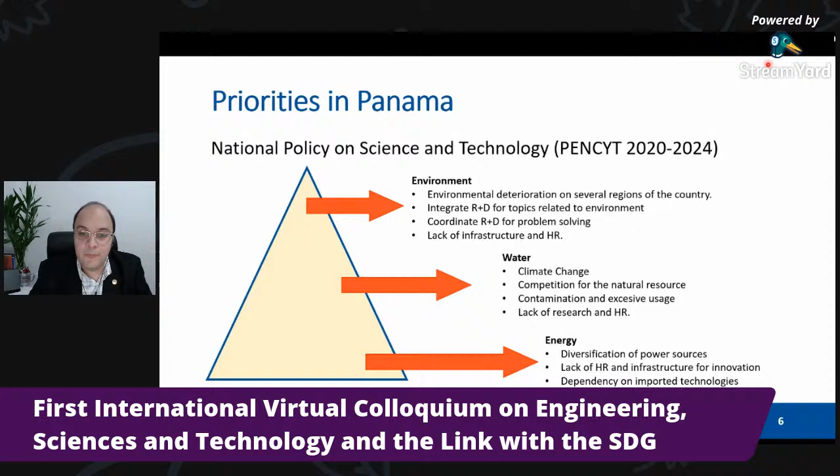They say, well, environment, we have deterioration in several regions of the country. We need integration of R&D for topics related to the environment, coordination for problem solving, and then we have lack of infrastructure and human resources. And that's a common denominator for all of the identified areas. Now, when one looks at the Panamanian policy for science and technology, you may say, well, infrastructure is not here. And well, it's not true. In reality, it is there.

Every time you think about water, as we're going to see here, for example, lifelines, one type of lifeline is the water supply network, and that's a type of infrastructure. So there's a deep correlation between these sustainable development goals that, at least here in Panama, we need to think about all of them every time we want to start a new research endeavor.

Now, the other plan that we have here in Panama is very well aligned with the United Nations SDGs. It does give us a little bit more leeway when we want to think about how to solve a problem, and the problem is not necessarily, let's say, water, which is a well identified necessity in the country. But if we deal with something that has to do with water, and find a way to solve other problems at the same time, then we have a project that is very attractive for policymakers. Now, with that brief introduction about SDGs and the reality here in Panama, the priorities that we have, I would like to move on to speak a little bit about the projects that we're developing here.

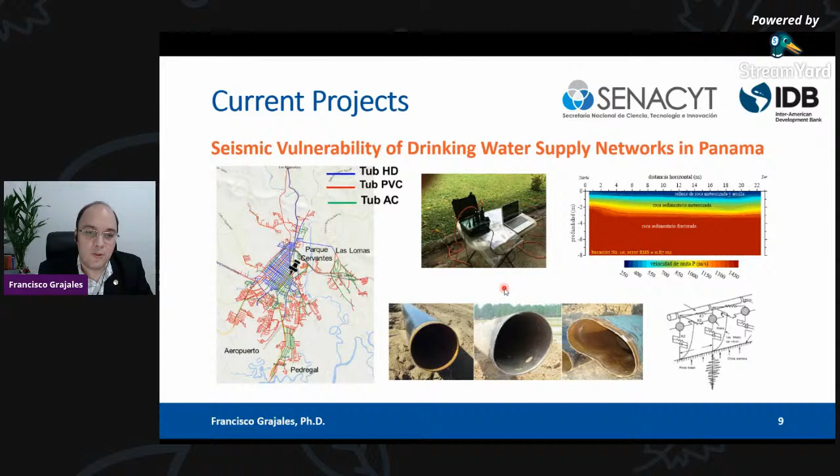So this is just to mention some of the components, and as you can see, the whole idea is, once we do all of these, to be able to generate a more complex risk analysis framework.

Now, project number two, we change gears completely and talk about energy. We have the project entitled Characterization of Tropical Soils for Low Enthalpy Geothermal Energy Applications. In this project, I am co-PI, so the principal investigator is the student.

Here in Panama, we have this type of project where the student is able to empower themselves as PIs with another responsible faculty member, in this case, Professor Guadalupe Gonzalez. As you can see, again, the common denominator between these projects here in Panama is that you have to deal with several of the SDGs.

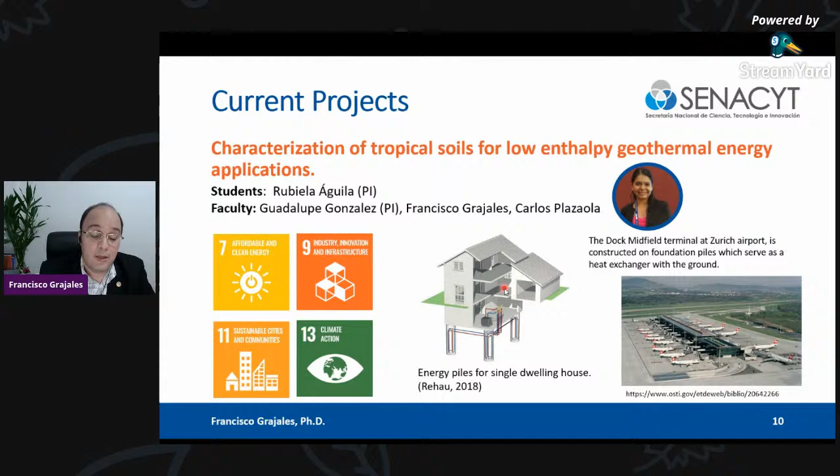Obviously, the main one here is energy, as we are trying to find sustainable sources of energy, but we are also innovating on the infrastructure, working on sustainable cities, and taking climate action, since we're reducing CO2 emissions.

The whole idea here is what we commonly call energy piles. We have a diagram showing that the foundation is part of the structure we need for support, and the idea is, why not take advantage of that and use the foundation as a heat loop, or a heat exchanger, to inject or harvest heat from the soil.

Some people, at least here in Latin America, are still skeptical about this, but we know that the technology has been successfully used in other countries. An example is this terminal at the Zurich airport. The terminal has 400 pile foundations, and 300 of them are energy piles, which account for most of the energy used by this building.

And again, we have this project, the third one: reuse of plastic waste for unpaved rural roads.

And as we can see, we are in the geotechnical realm, but we range widely. Geotechnical is a very wide area. And I want to use the opportunity here, since the students here, Ana Boyd, Orlando Leyva, Dariana Martinez, Monica Flores,

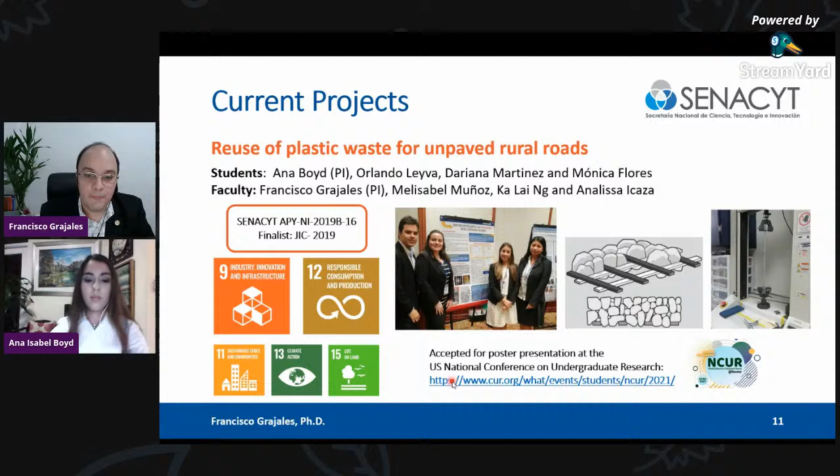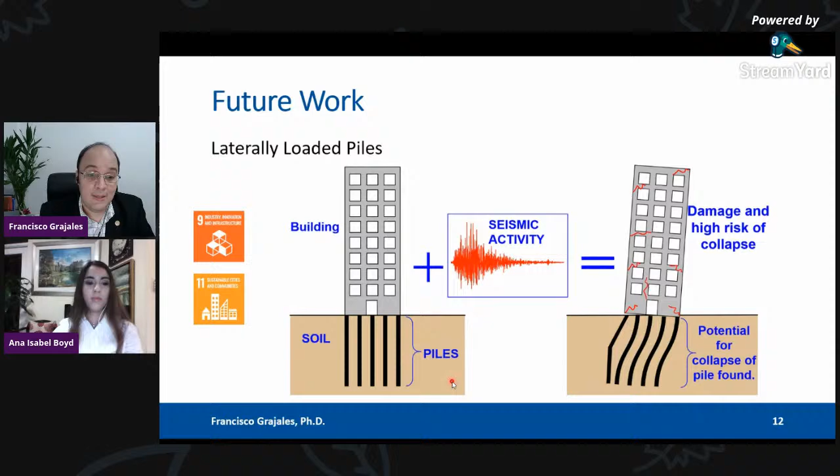You may think when you see the building, you may say, well, it's a tall building, it's beautiful, but what lays underneath of the building is what really supports the structure. And at least in our country, we don't have a well-defined framework for this analysis, basically because it's very costly to do so.

And the other topic that I find interesting to delve into, and we kind of started talking about it, but we haven't yet tried to get funding for it, is what we call, at least in geotechnical, soil bioengineering and biotechnical slope stabilization. And the whole idea here is to find a way to put together our geotechnical solutions with the ecosystem.

So to put a practical case to our audience and viewers, one of the most common cases here in Panama is when you have to do a riverbank protection. It's something that may have to be done many times these days, since we had 2 hurricanes hit us a little bit hard in some of the country's regions.

Now, the most common idea is to say, well, let's use some gabion walls and put them together, stack them, and ensure stability, and that's it.

Well, when you think about it and you look at other countries, for example, at the USA, they have the USDA manual for river protection, and there are options in which you can combine a simple gabion wall with plants and create a micro ecosystem that could serve as a buffer region. So that's another idea that we have in mind.

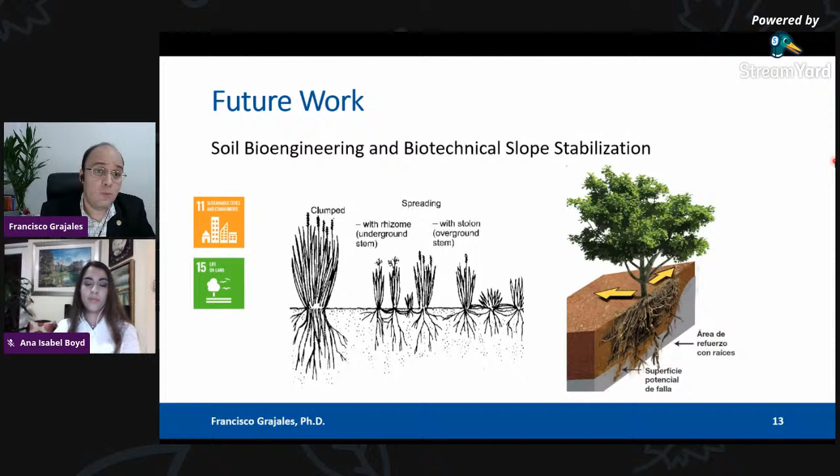We have done some minor research on this, but still need to delve into it. And with that, we are done with our presentation. And in case there are any questions, I guess this is going to be at the end of the work table. Thank you very much to everyone.

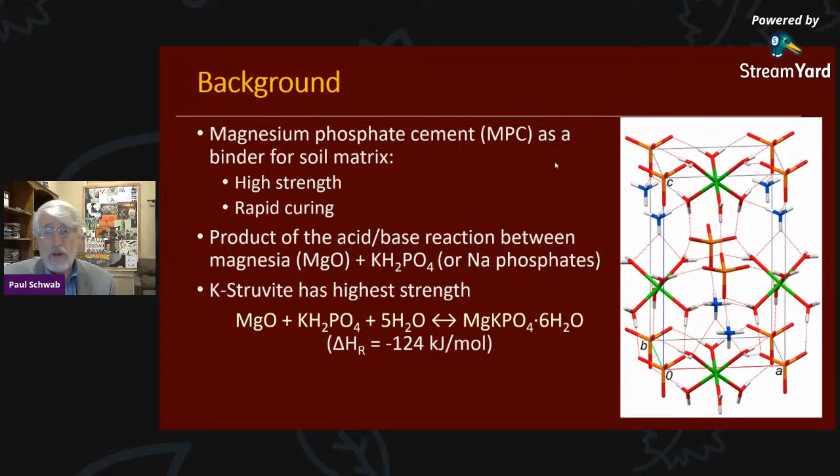We'll talk about that in just a moment. A general sort of look at the chemical structure is given off to the right. You can see that it's somewhat complex. All the dashed lines indicate the hydrogen bonding occurring within this lattice, and it is quite strong. We'll talk about some of its properties here in just a bit.

Now, the rationale of using these cements from a sustainability basis is that magnesium phosphate cements as binders for soil will leverage the use of local materials. As was mentioned in the introduction, this will include some indigenous soil, so you don't have to import things. Sand can become unnecessary if the soil has the right composition. Also, magnesium phosphate cements have a reduced carbon footprint. They don't emit nearly as much carbon dioxide during their production, partly because of the much lower temperatures used during the calcining of the magnesia.

In formation of some of the precursors for Portland cement, much higher temperatures are used. There's tremendous amounts of carbon dioxide emitted during this process, as well as the amount of energy expended, which also ultimately results in the expense, or the emission, of CO2. Now, in addition to emitting less CO2 during its production, magnesia can also absorb CO2 to form carbonates and hydroxycarbonates after its formation, without weakening, which is a very large benefit when it comes to sustainability.

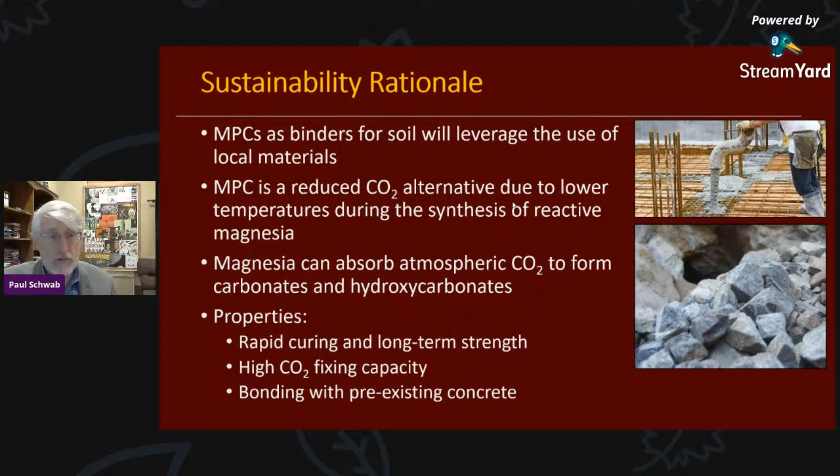So the objectives of this overall research project, which has been in place for several years and is continuing forward, is to test various magnesium phosphate cement matrices and formulations on different soil types from all over the world, look at a range of magnesium to phosphate ratios as well as water to solid ratios. Ultimately, we test for strength at various curing times, and explore the mechanisms of interactions between the cement products with soil minerals.

To approach this last objective, we've been using thermodynamic and molecular modeling. This has been sort of new, particularly on the molecular side for us. And then we look at some of the spectroscopic examination of the soil to look at the various specific things that are forming in the soils during the setting of the cements.

I'll give you a generalized approach that we've been taking to these cements. We start out with a very specific magnesium oxide. This is something we found out early on, is that not any magnesium oxide will do. It has to be calcined in a very specific way. It doesn't have to be particularly pure, but it does have to be heated to an exact temperature, so it's calcined in a multiple hearth furnace to give the compositions that's necessary.

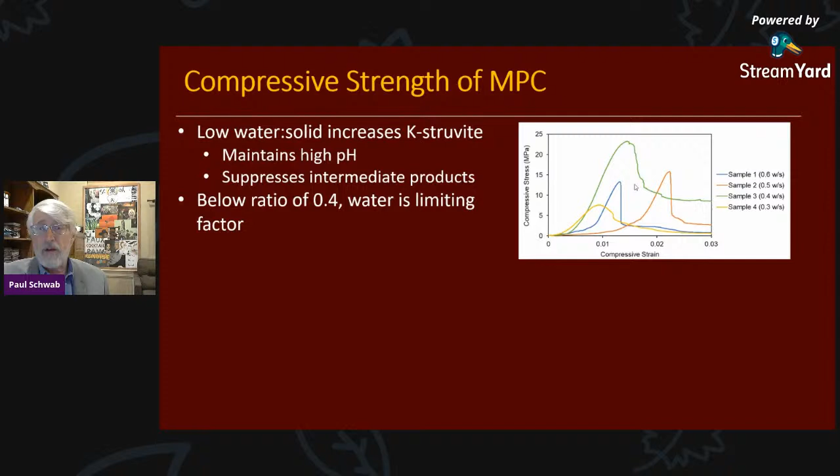Just adding up to 0.4 water to solid ratio increased the strength tremendously. The compressive strength became very high. And if we go to higher levels, we see that the strength falls off again. So we do see an optimum water content for the formulation used in this case at about 0.4. The asymmetry of these curves is indicative that these materials tend to be brittle, so they take a lot of stress in the beginning, but once they start to fail, they do fail quickly, as shown by the steep curves shown here.

These two bar graphs give you an idea of the compressive strength and elastic modulus that we've generated from some of these examples shown in the curves above. You can see that the compressive strength is good. It's not the same thing as Portland cement, but it does quite well considering the amount of actual soil that's in this composition. We'll talk a little bit more about even increasing the amount of soil beyond that.

And the elastic modulus also reflects the brittleness of this material. We've been approaching the problems with the brittleness by adding some organic fibers to the mix. Again, this could be any sort of organic fiber.

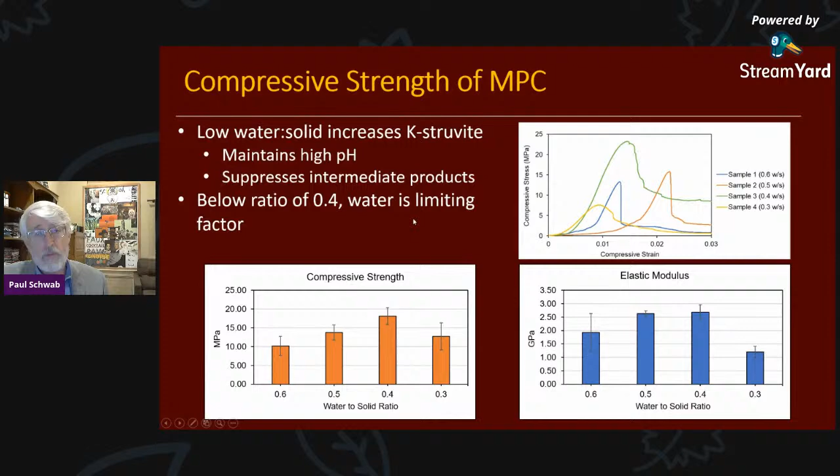We've used jute fibers made from rope, or we can use some of the carbohydrate materials from growing crops in the region as well. We've tried all of these. They all seem to work in the same sort of direction, giving a little bit more flexibility to these columns

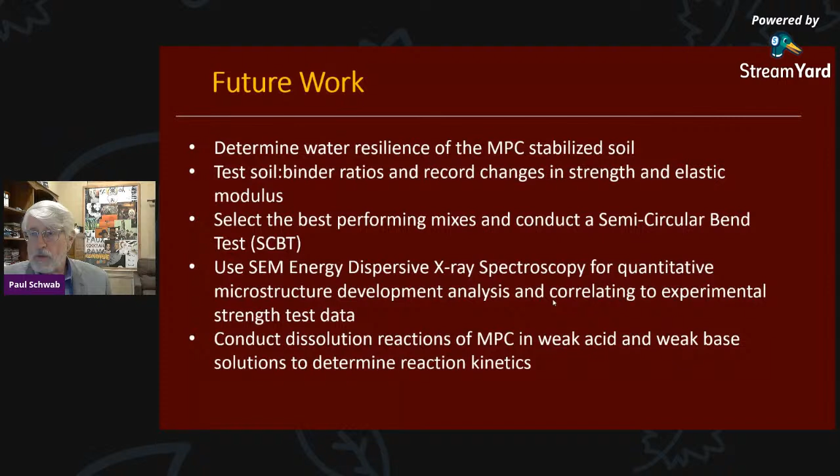And then finally, we're also looking at the dissolution reactions of the magnesium phosphate cements in weak acids and bases to try to get an indication of the reaction kinetics. This will give us the ability to project forward and get a good indication of how durable this material may be. Anyway, it's been a pleasure to give you this very brief overview, and I look forward to answering any questions you might have at the end of this session.

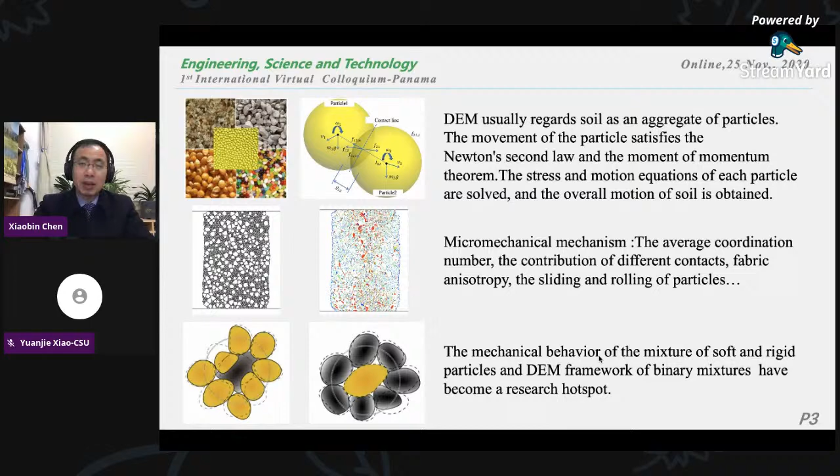I'll talk about polymer fiber used in ballast, and I use DEM as a tool to investigate the mechanisms of these materials. My topic is the analysis of shear dilatancy of railway ballast and rubber fiber composite aggregate. I will focus on the influence of rubber stiffness today.

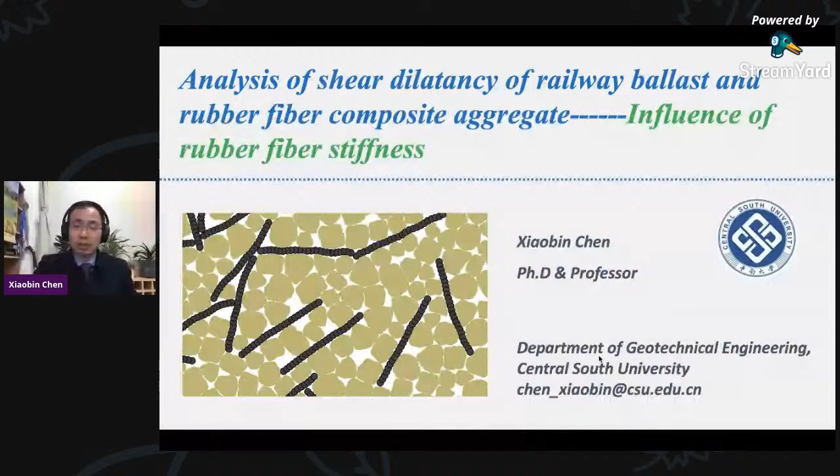First of all, I want to show appreciation to three of my students: Dr. Zhang, Mr. Yang, and especially Abby. Abby is one of my international students, and we are supervising her together with Dr. Francisco.

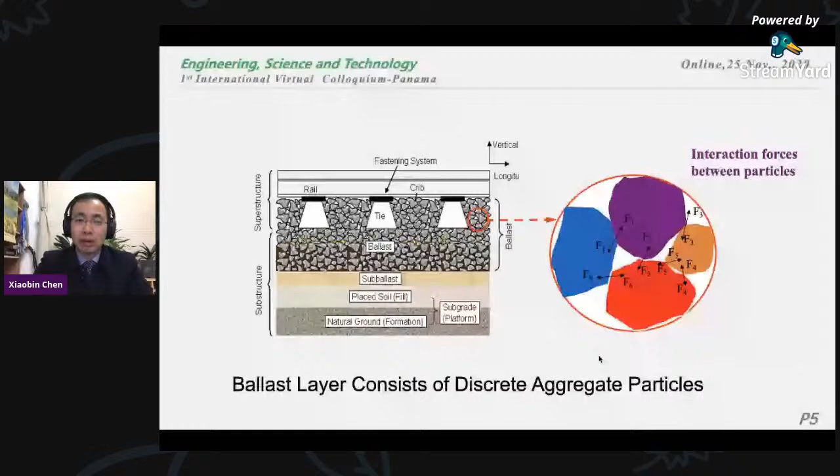As we know, ballast consists of many discrete aggregates together to support railway loadings. Under dynamic loadings, degradation happens occasionally, so we want to find solutions to resist degradation over many years.

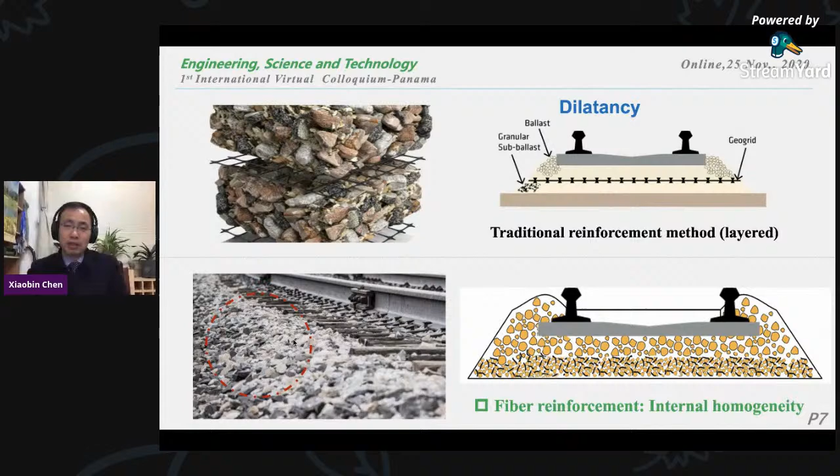We know the ballast has some shortcomings at the shoulders, and sometimes failure happens in a dilatancy style.

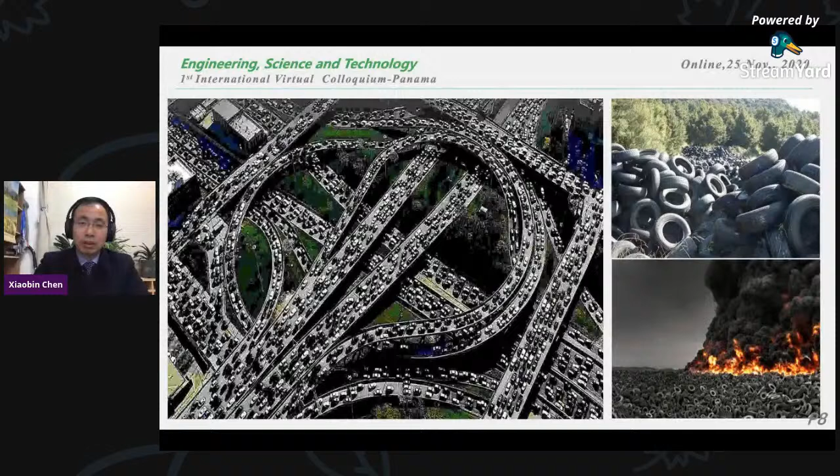So today we want to find renewable, recyclable materials, such as used tires, cut into strips to act as a polymer fiber. We have finished several research works on this topic.

We have finished several dozens of large-scale monotonic tests, and we found that the optimum value for the polymer fiber content is between 10% and 20%.

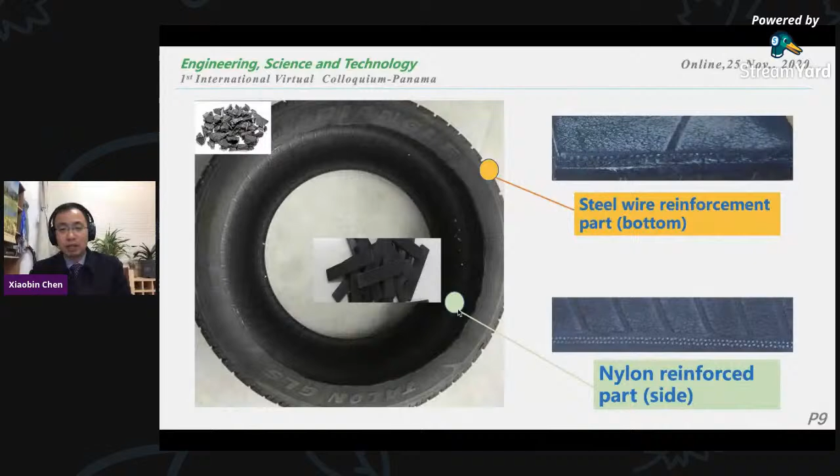As we know, there are different parts in a used tire. On the face of the tire it's reinforced with steel wire, and on the inside of the tire it's reinforced with polymer, for example nylon. So it's very clear there's a difference, quite a difference, in stiffness between the surface of the used tire and the inside of the tire.

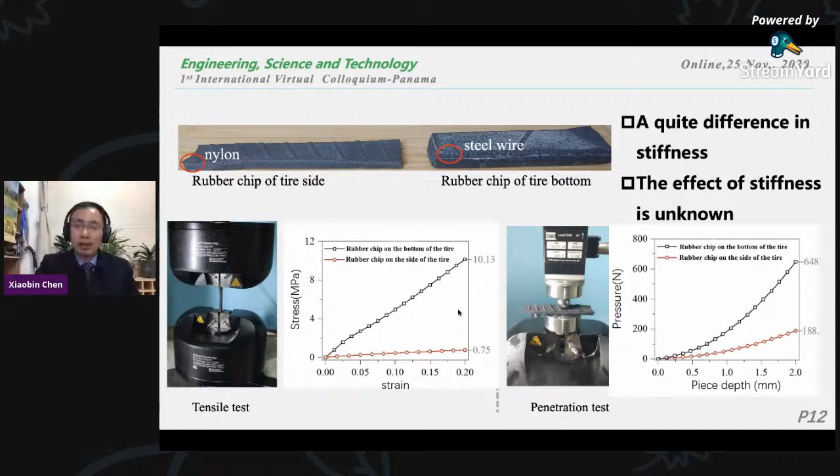So I think we should understand the difference in stiffness behind the polymer fiber and aggregate mixtures. Today I want to use the DEM method to research the effect of stiffness of the polymer.

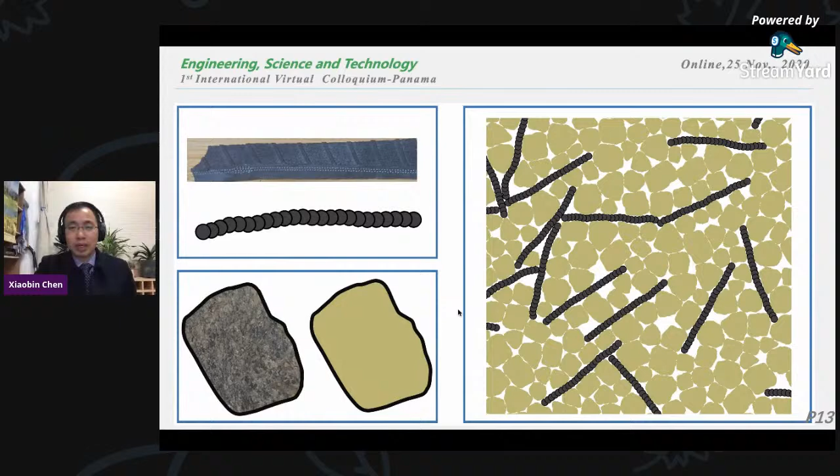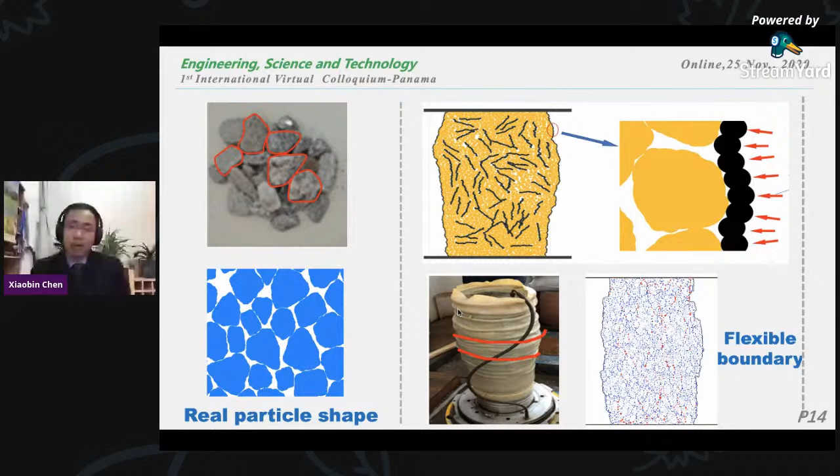We divided the materials into discrete elements with DEM, considering the real particle shapes of the ballast, and we also used a flexible boundary to simulate the membrane in the triaxial test.

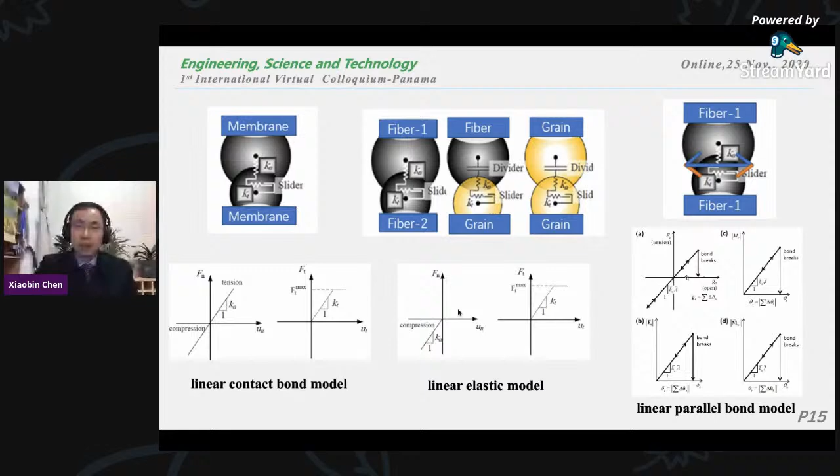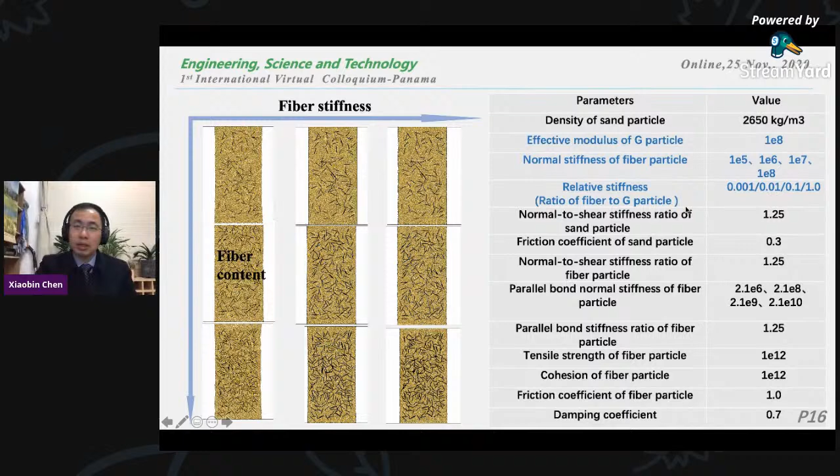This is our simulation process, and we got some stories from the DEM test. As we know, higher stiffness of the fiber can increase the peak strength — that's clear in our results.

Another important story is that the stress-strain curve tends to be a strain hardening type under lower fiber stiffness. For example, when the stiffness is about one times ten to the five.

It's a strain hardening type here, and with a higher fiber stiffness, it is totally changed. There is a strain softening in the stress and strain curve. So I will tell you some specific information behind this kind of story.

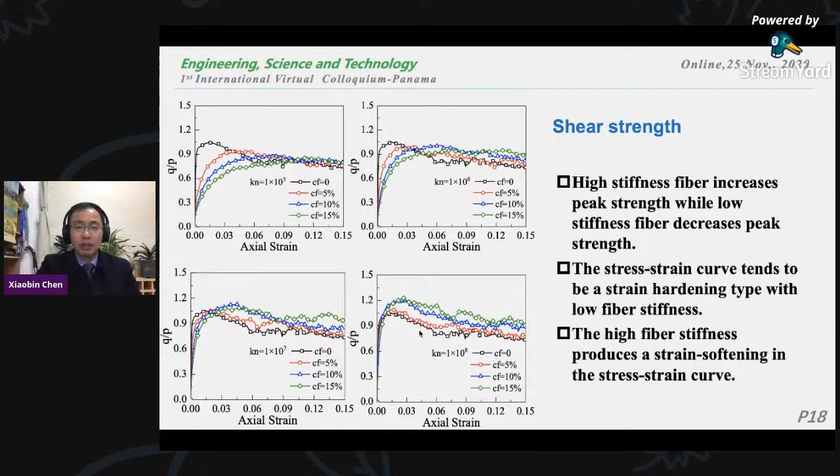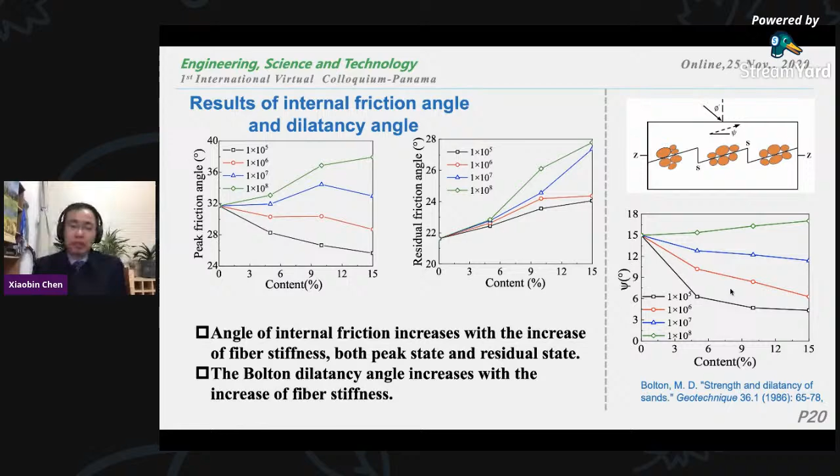As for the volumetric strain, it's the same, so I want to share some stories behind this phenomenon. We used the Bolton-defined dilatancy angle, and the dilatancy angle increases with the increase of fiber stiffness. That means if the fiber stiffness increases, the dilatancy will be developed.

For the average coordination number - what's the average coordination number? That means if they have a fiber aggregate, how many aggregate particles will be connected with one fiber? That is the average coordination number story. With the increase of fiber stiffness, the average coordination number decreases, meaning the dilatancy increases. That means if the stiffness of the fiber is too high, maybe more failure will happen at the ballast shoulder.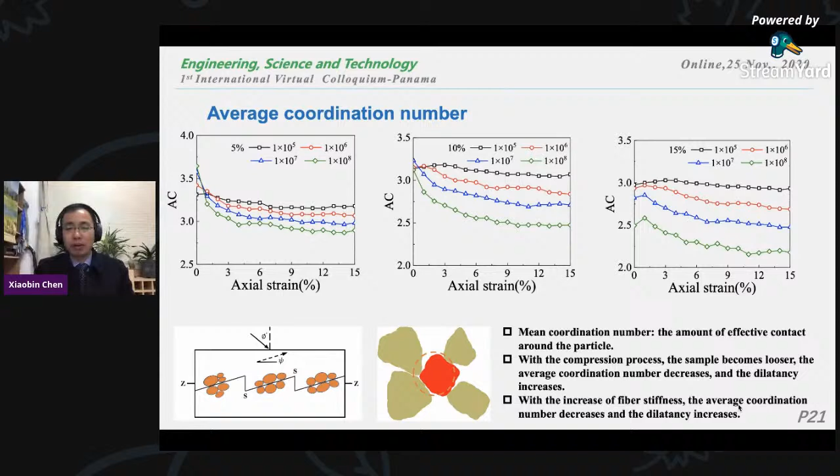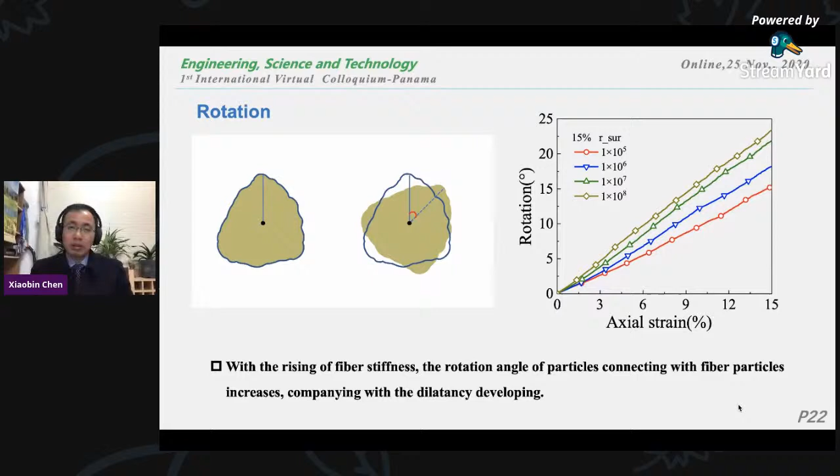We also got this very specific story of particle movement, for example rotation. With the rising of fiber stiffness, the rotation angle of the gravel particles - here meaning the ballast connecting with the fiber particles - increases. That means when the fiber stiffness is rising, the rotation nearby the fiber will increase, accompanying the dilatancy development along with the strain softening shearing behavior and the increasing dilatancy angle.

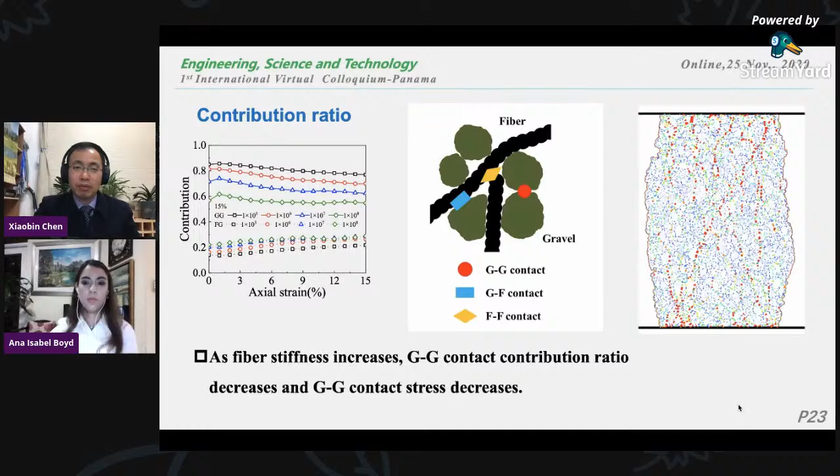We also use the contribution ratio to explain the dilatancy happenings, and we find that as the fiber stiffness increases, the aggregate-to-aggregate particle contact contribution decreases. That means the aggregate particles will support more to resist the traffic loading and the railway loading.

Then we examine the internal tensions of the fiber, and we find that with the increase of stiffness, the average tensile force of the fiber will increase. That means if the stiffness increased, the fiber can support more forces to resist the traffic load.

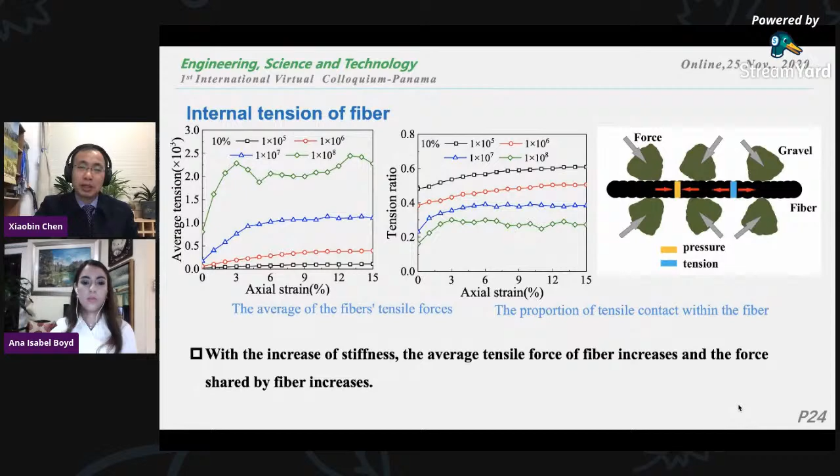So here I want to go very quickly to my conclusions, because I only have 5 minutes to share my story. We got some very specific findings on the fiber stiffness and on the dilatancy of this kind of composite. We think when the fiber stiffness is relatively large, close to the ballast particles, it will trigger the dilatancy developing, and that's not helpful for the ballast shoulder stability.

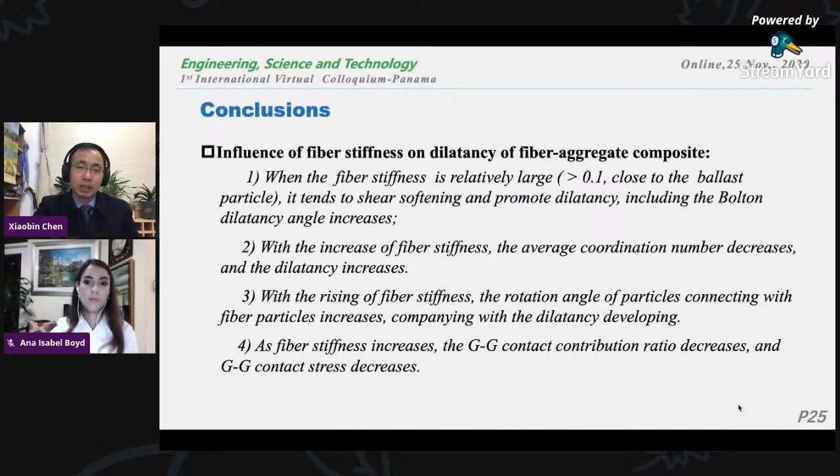And second, with the increase of fiber stiffness, the average coordination number decreases. That means the dilatancy increases, as well as the rotation angle of the particles, and the aggregate particle contact decreases. So I think this is my story about the fiber aggregate composite in the meso scale dimension.

To do this kind of research, our aim is to hope to help the Chinese government, the Chinese railway company, to use this kind of recyclable material to settle some real problems in ballast railway and to get a sustainable development.

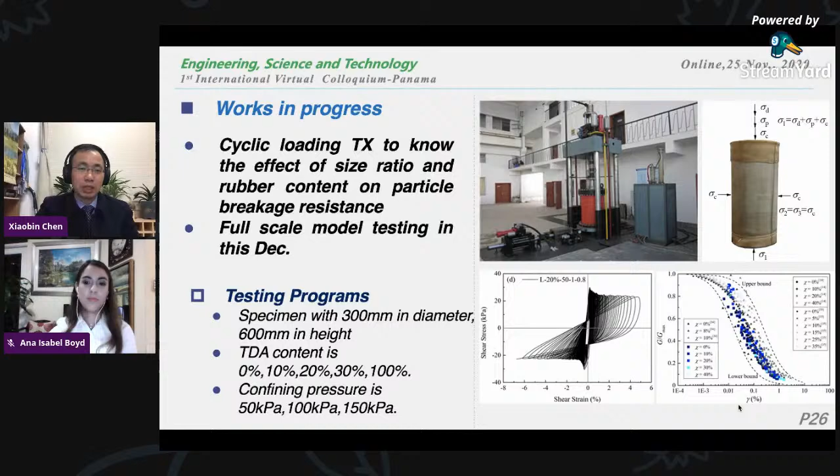Our next work will be focused on dynamic loading triaxial testing to know the effects of size ratio and rubber content on this kind of scale. Maybe we will conduct some full-scale model testing this December.

So I'm going to present forensic analysis and numerical simulation of a catastrophic landslide, which occurred in China several years ago, due to the combination of dissolved and fractured rock masses with underground mining. And as Ana just introduced, I'm from the School of Civil Engineering, Central South University, China.

In the next 5 to 10 minutes, I will quickly present the following parts. First, I will quickly introduce the background of the problem, and then I will introduce some forensic results and also some discrete element modeling simulation results.

So here is a quick introduction of the catastrophic landslide event in China. This happened in a remote mountain area in China, and at that time that was a very catastrophic event with 490,000 cubic meters of debris generated, and the kinetic energy of the collapsed rock debris was so great that the travel distances were beyond 600 meters. Therefore, it caused severe life losses and property damages.

And I have a short video to show at the end of my presentation, just to let you see how serious the landslide was.

And as an effort to do some forensic analysis, we were able to identify some possible causes of this landslide, which includes intrinsic geological conditions and underground coal mining. Actually, the focus of this presentation was on the discrete element simulation part.

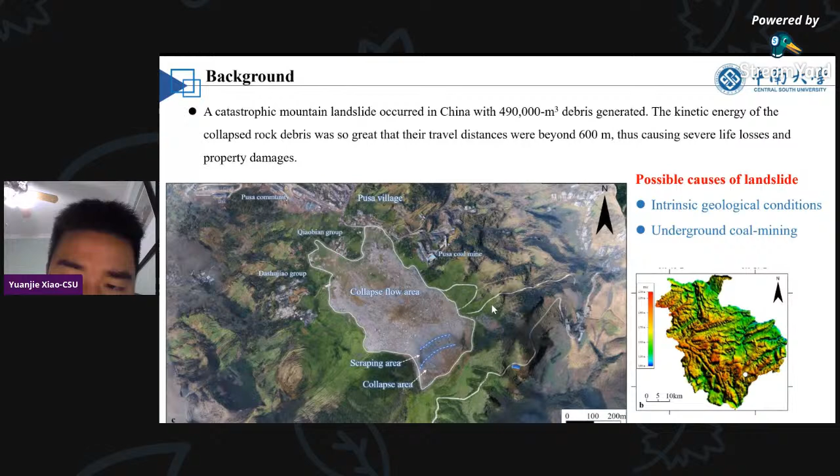First of all, let me briefly introduce the geological and topological conditions in this event. The landslide is located in the karst regions, which means rock masses are very susceptible to dissolution and fracture. And the geological formation of the landslide is unique with very high elevation differences.

So after some field investigation, we found out that the mountain had very hard upper layers and very soft lower layers. There were two primary joints in the collapsed rock masses, which means the rock masses are cut by such two primary joints. Another very interesting thing was that there were staged coal mining operations under the bottom ground of the collapsed mountain, which means we also have to pay attention to the underground coal mining, which might be one of the triggering factors.

And the intrinsic causes include the geological formations, topological features, and degraded rock masses, which means the rock masses are relatively disintegrated due to the harsh environment.

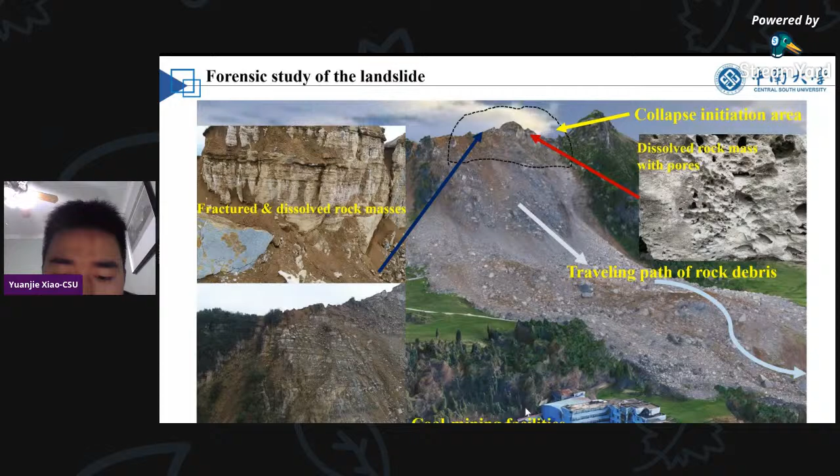Here are some photos we took in the field. As you can see, here is the top, that's the initiation area of the landslide, and there are some close-up pictures of the rocks. As you can see, they have some dissolved pores and also some fractures going on, and the travel distance of the rock debris is so great that they even damaged some coal mining facilities at the bottom of the mountain.

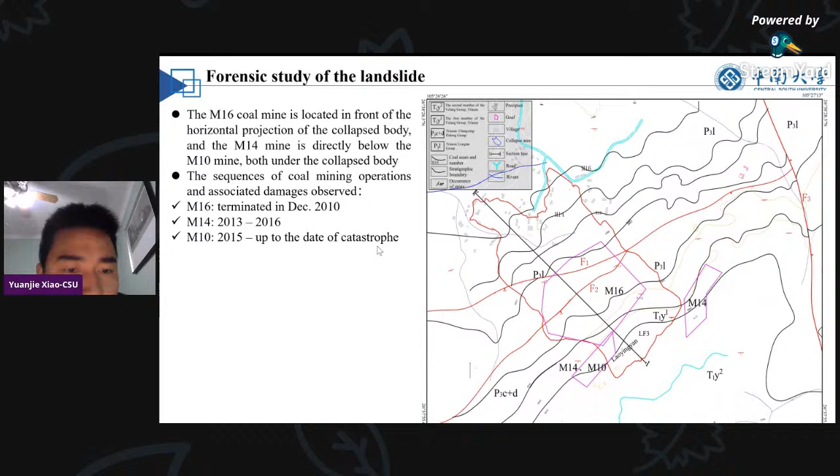Okay, so as you can see, regarding the coal mining operations, there are three different coal mines, M16, M14, and M10. As you can see from this, M16 was terminated in 2010, and M14 was active from 2013 to 2016. And M10 was started in 2015 and was active until the date of the catastrophe.

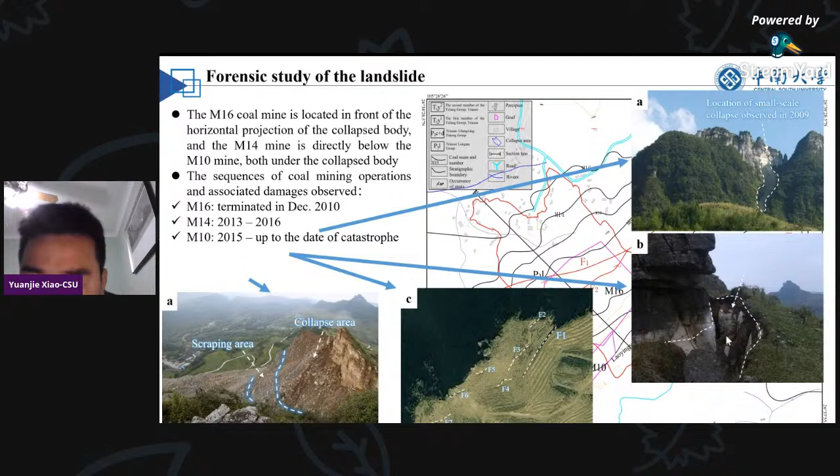So this presentation was mainly about finding out what are the potential causes for this catastrophe, so that in the future we can come up with some remedial measures to avoid such catastrophes, and also try to figure out what are the real causes for this catastrophe.

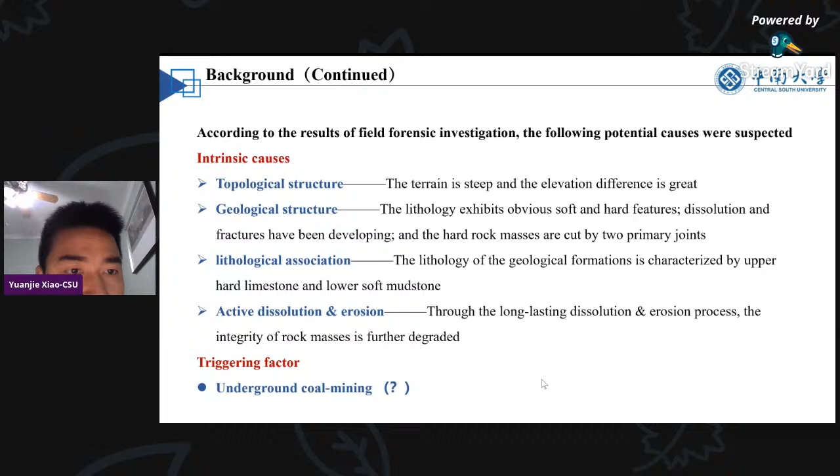We consider several factors. First of all, we have to consider the intrinsic causes, which are the dissolution and fractures in the rock masses, and we also consider underground coal mining operations. So in the numerical simulation part, we break it into several different tasks.

First of all, we analyze the deformation failure mechanism of dissolved rock masses with pores. Second, we simulated the fracture and deformation characteristics of rock masses with randomly distributed fractures. Third, we combined the previous two, simulating rock masses with both dissolution and fractures.

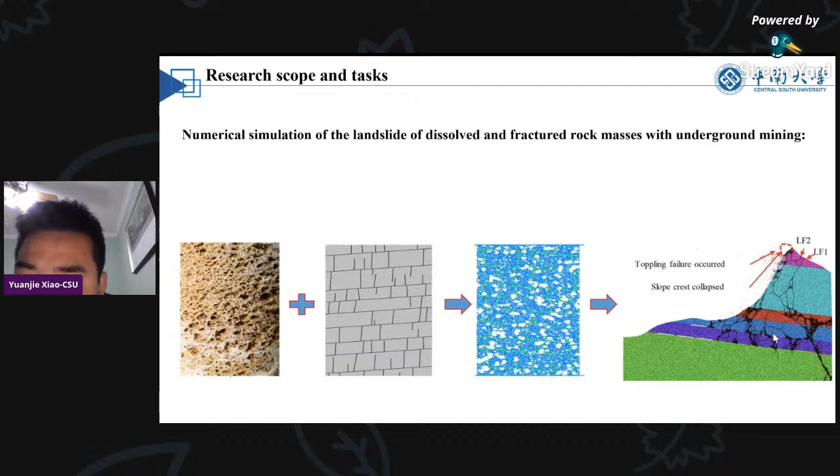And the final step, I did the mining operations at the bottom of the mountain, simulating the application of all these different situations to try to understand how the damage would initiate. So I will quickly go over some results from each different task.

So for the first task on the dissolved porous rock mass, we collected some field images and used digital image processing techniques to simulate the uniaxial compression behavior.

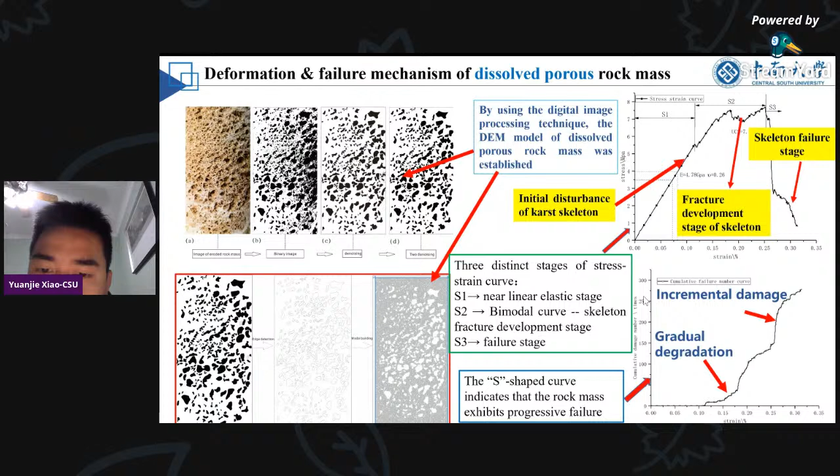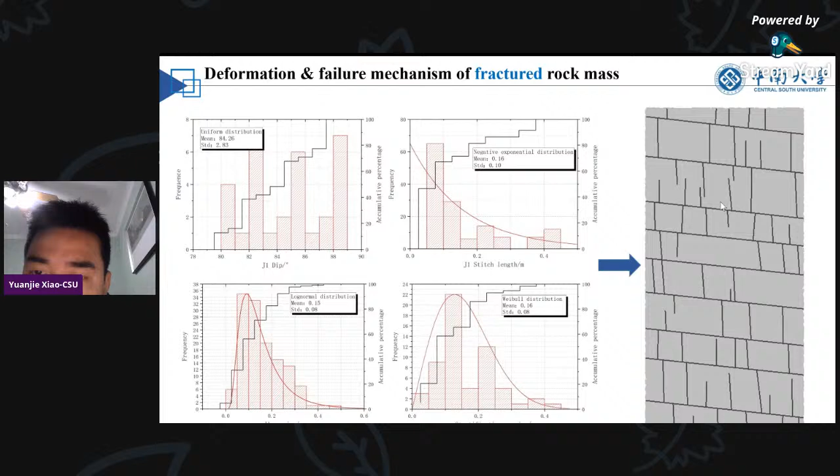In terms of the simulation of fractured rock mass, we also collected statistical parameters for the fracture distribution in the field, and input those into the discrete element simulation. These are the simulation results of the biaxial compression test of fractured rock masses, and we were able to identify the failure mechanism.

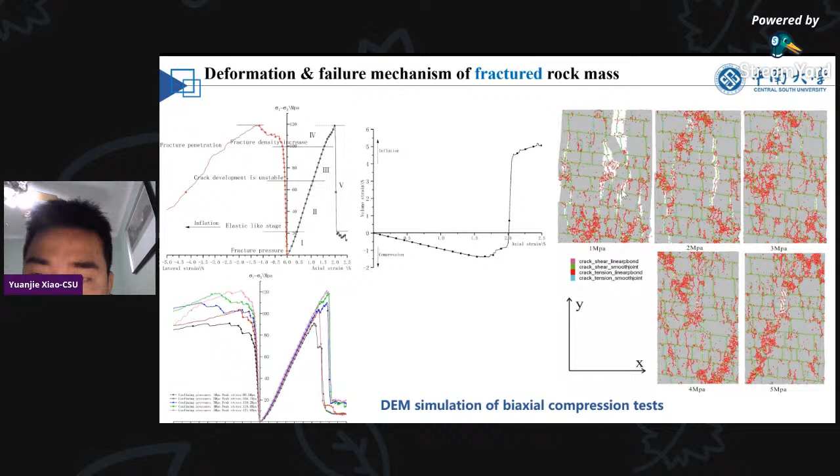As you can see, the vertical fractures play a major role in the damage.

The middle one shows the third task. We combined both dissolution and fractures, and simulated the damage mechanism of such rock masses at different levels of degradation.

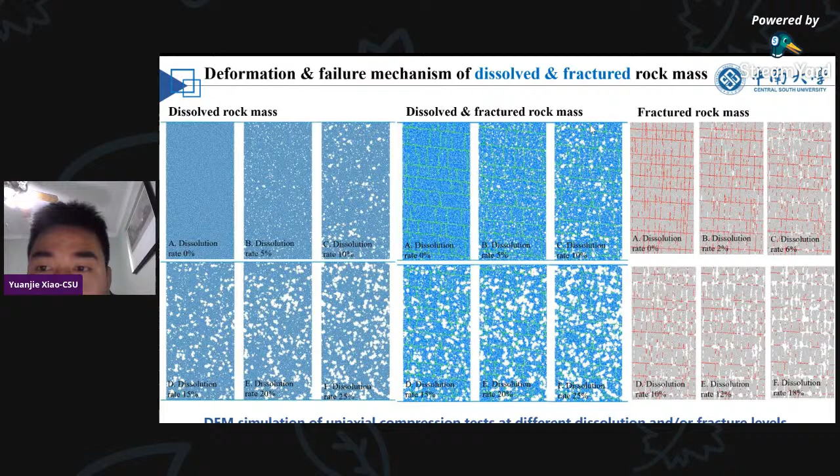Here are the DEM simulation results of the uniaxial compression test at different dissolution or fracture levels.

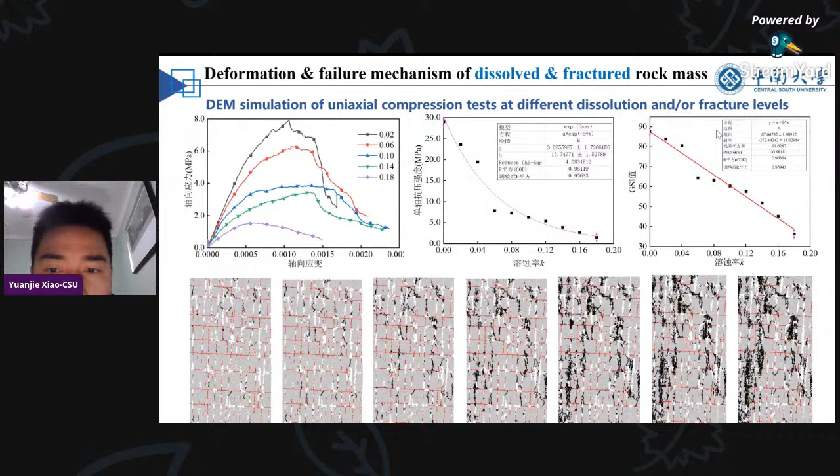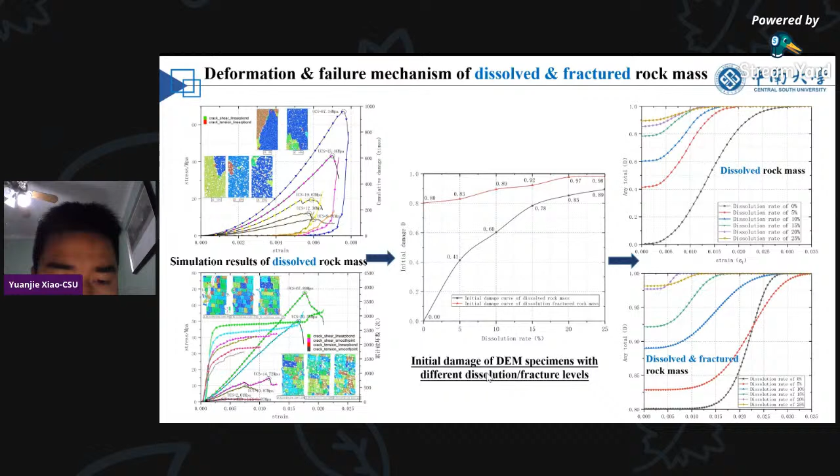We also simulated the damage evolution, how the damage evolves with different dissolution and fracture levels. This is the DEM contact force chain for one of the results.

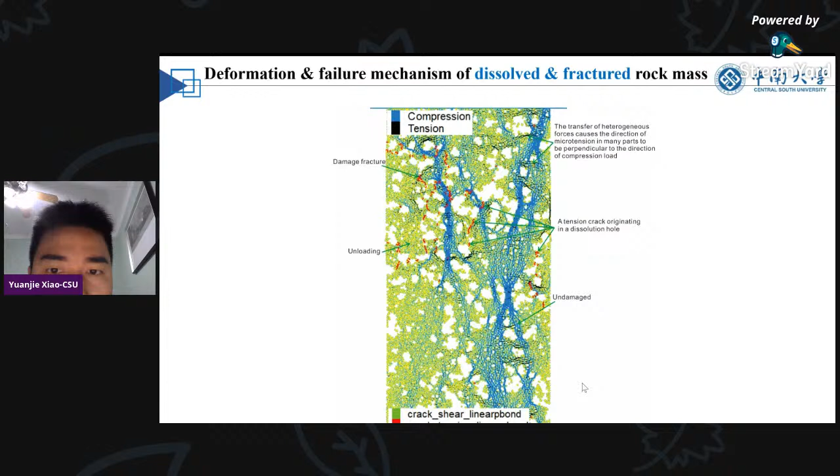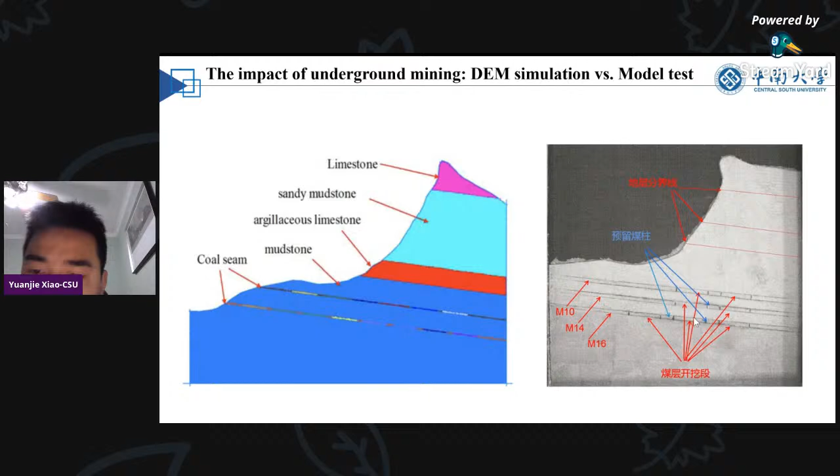We also did a complete DEM simulation considering dissolution, fracture, and underground coal mining operations together. We also did a small-scale physical model test to verify some of the DEM simulation results. Here are some of the simulation steps we did.

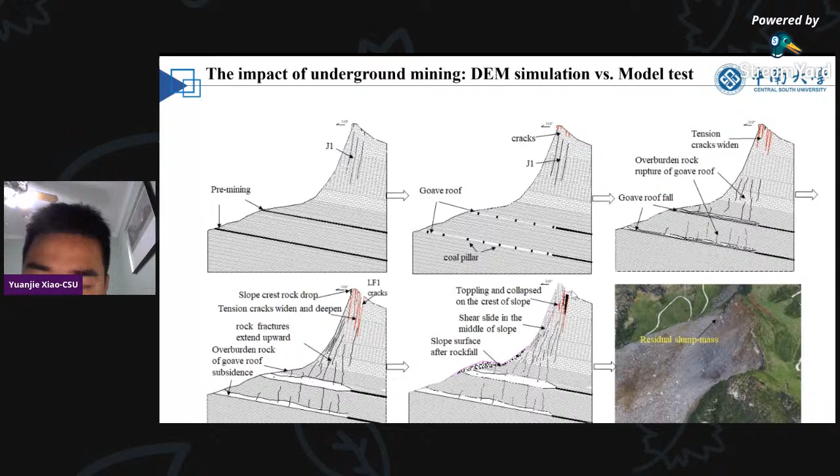First, we considered the top of the mountain to be very dissolved and very fractured, and then added staged coal mining operations. We observed how the deformation transfers, how the cracks initiate, and how the collapse initiates, and compared this with the small-scale physical model test as well as field evidence we collected. Here are some quick simulation results.

So we combined the finite difference method and the discrete element method to complete this numerical simulation.

We were able to obtain some correct characteristics from the DEM simulation, and they overall agreed with the findings from the forensic field study.

Here are some results from the physical model test. The collapsed area from the physical model test matched the observations at the field site.

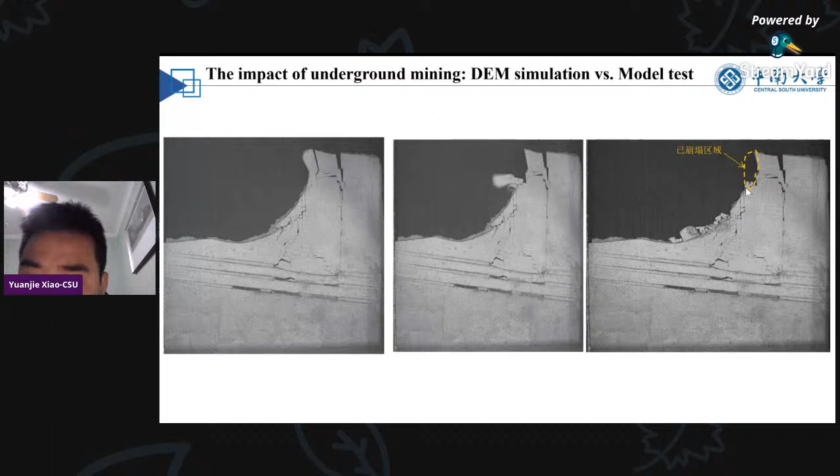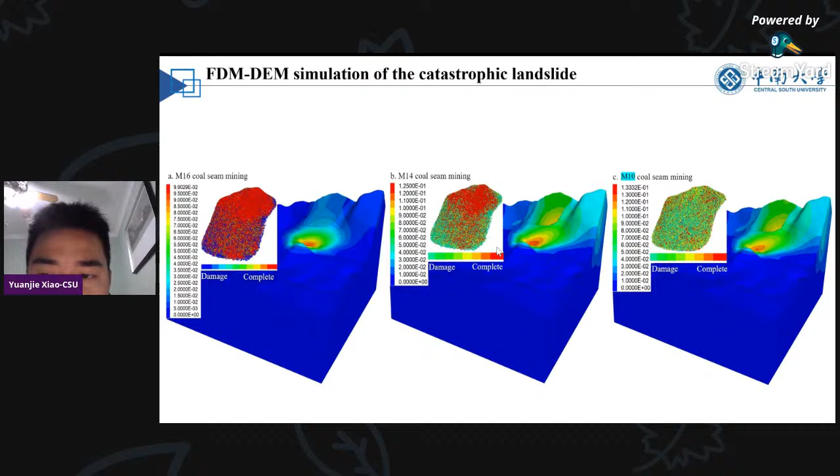The rest are some remaining results from the numerical simulation. We tried to understand, for the collapsed zone or the loose debris from the collapsed zone, how they move and what their kinematic characteristics are, and so on.

So in summary, we conducted a forensic study of a catastrophic landslide event in China, and the main goal was to understand what factors caused such an event.

In the future, we plan to continue working on how to come up with remedial measures, either to reinforce the mountain or to reinforce the coal mines, to avoid such catastrophic failures in the future. Those are the main goals of this study, and we hope that by this effort we can address Sustainable Development Goal number 15, which is to save lives on the land.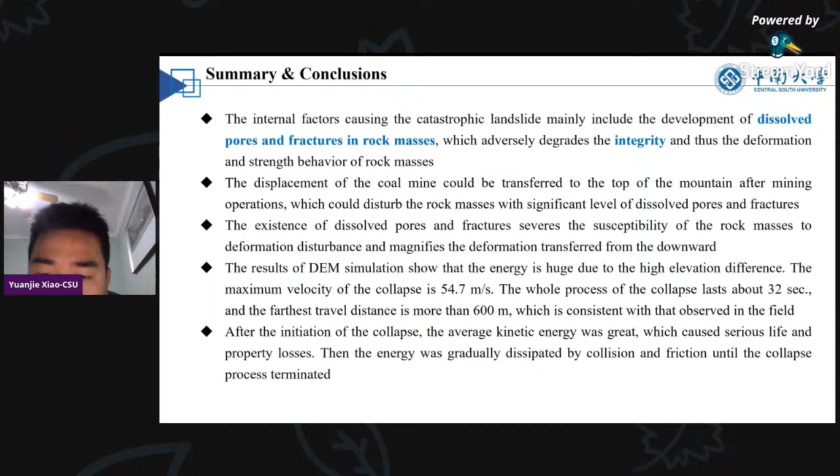Thank you very much. I will now play a short video about the event, so that you can get an impression of what I just said.

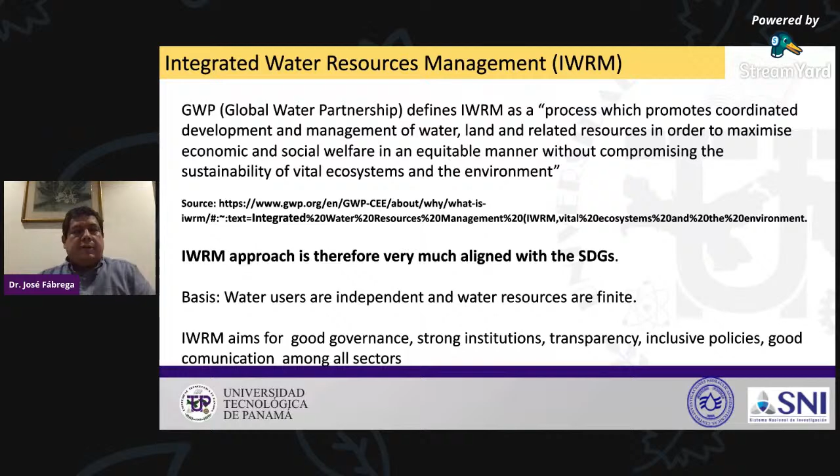That means also strong institutions. You need transparency, you need policies that are inclusive, in a sense that everybody can participate and communicate, and then the use of water can also be efficient - not too concentrated in one issue.

Next one. In the case of Panama, about 66% of the population live in urban areas. There are big inequalities compared with the indigenous areas, which are 10% of the population and can go as low as 28% for water access. You should see the average water access for drinking water in Panama is 90%, and that's the average.

But you have about 10% of the population in the indigenous areas, where access can go as low as 28%. So when you see that, you see big inequality. That's something that has to be addressed.

Also, since you have rapid population growth, mainly in urban areas, it's hard for the government to keep a good pace with the construction of infrastructure. Even though Panama has 80% of our watershed with a good water quality index, urban rivers, basically in the middle and lower basin areas, have bad quality. That's the case of the city of Panama. That's one of the reasons.

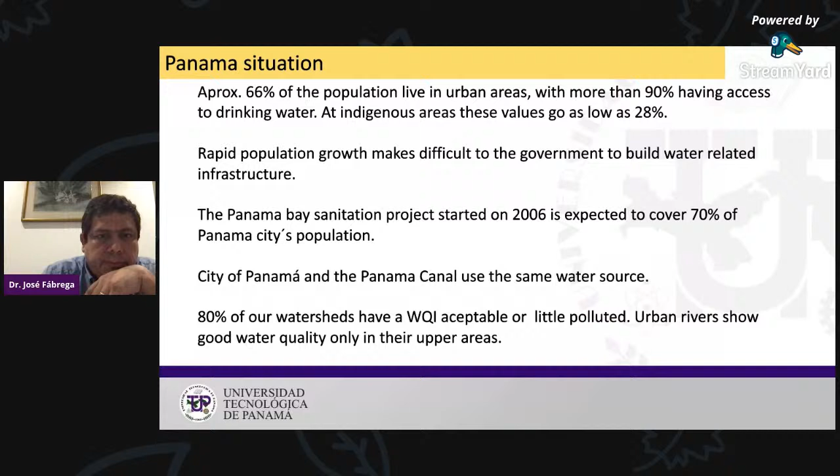Some proposals to improve the situation, aligned with what is IWRM.

We need a stronger institution, as I said -- a water authority would be nice. Right now water is fragmented. For example, the Minister of Agriculture has some goals, and different institutions have different uses for water, working a little bit uncoordinated. That happens also in the UN -- you have different agencies with different agendas for water, and it becomes complicated. So we need a strong institution in the country, and a modern legal framework. The framework we have right now is from 1966, called the water law.

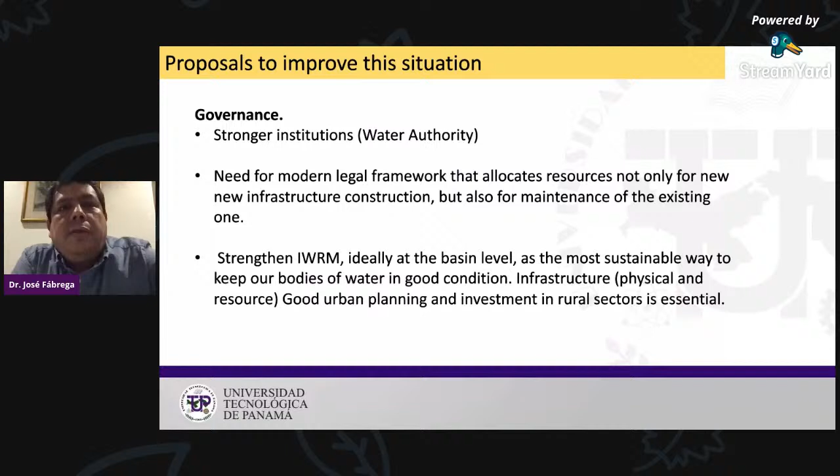In a way, we need to strengthen IWRM. Right now in the Panama Canal watershed we have that, but we need to use that in the other 51 watersheds that we have in the country.

Infrastructure is also important. When I talk about infrastructure, I would like to talk about human resources too. It's important to increase the education level of the population as the best way to reduce gaps, and also to reduce the rapid population growth, or the immigration to cities, which is becoming a problem too.

We have a national plan for water security 2015-2050. That is a step in the right direction. However, it needs periodic reviews. With this plan, CONAGUA was also created, a committee basically to oversee the advances of all the infrastructure projects within this plan. It also improves aspects of water treatment and continuity of access. Even though 90% of the population has access, continuity is not 24/7 in some places.

Greater investment in research and development of technical capabilities is also important. Another point is to develop integrated activities. Sometimes we wait too much for the government to do things. It's important that the private sector comes together with the public sector, and also takes the initiative to develop a more efficient way of using water.

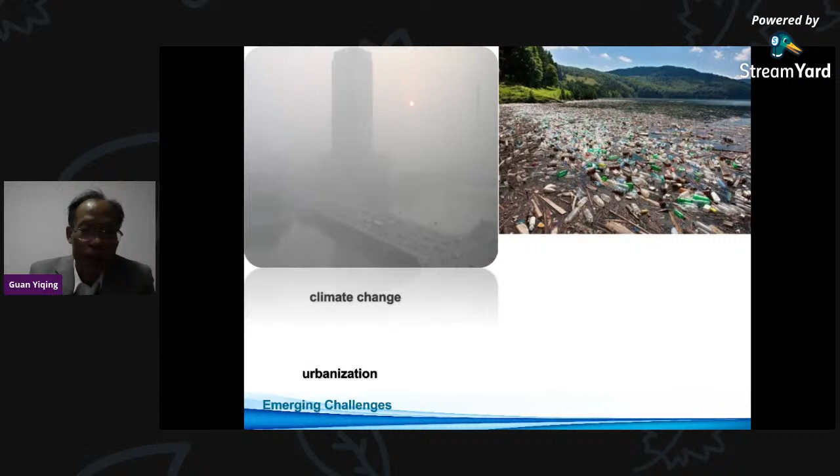At the same time we should consider climate change and urbanization in China, as more people move to the cities. The size of cities, during the past 20 years, has grown about 3 or 4 times, especially in the east part of China. If you come to China you can see that. It's really a beautiful city, but sometimes considering infrastructure, we have a lot of problems.

Water supply is okay, but for wastewater treatment plants we have fewer. So we have a lot of problems, not only water pollution but also air pollution and soil pollution. All three types of pollution eventually introduce pollutants into water bodies, one being lakes and one being rivers, which pollutes our water bodies.

China is a bigger country with a lot of water problems. Water resources are finite, and there's an uneven distribution in time and space. In time, it's not equal for every month, so there's seasonal variation. It's also unevenly distributed over space—in China, South China has more water, while the northwest part has less. These water resources are also unevenly matched with agricultural production.

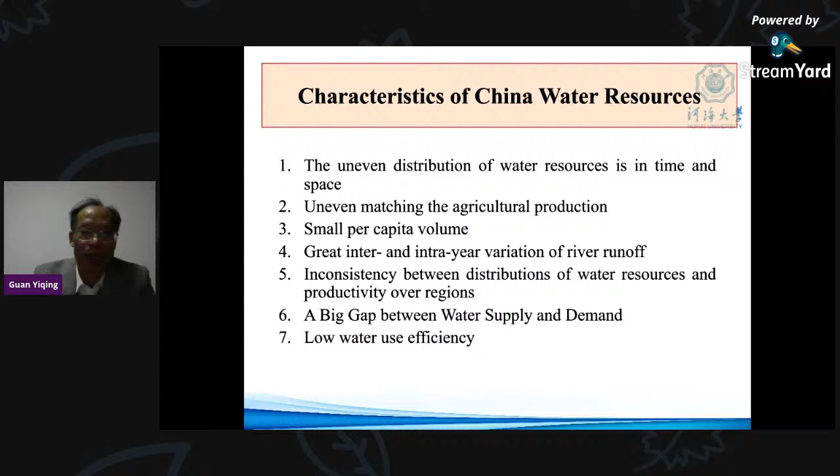For water resources development and utilization in China, we have different phases—five stages along the timeline. Stage 1 is basic demand, meaning normally there's enough water, and during that time the water is clean, with no pollution. The next stage is basic and economic demand, not only for living use but also for economic development—agriculture, industry, and other purposes.

The third stage is advanced demand emerging, which includes every part of demand from all users. The last stage has advanced demand and multi-demand, consisting not only of production but also pollution control, water resources reform and development, and soil conservation.

This means we study water problems not just by looking at water itself—we should consider the land, the air, and everything, because pollutants and particles move and eventually flow into water bodies. So studying water problems should include not just water directly, but also the surroundings and the environment.

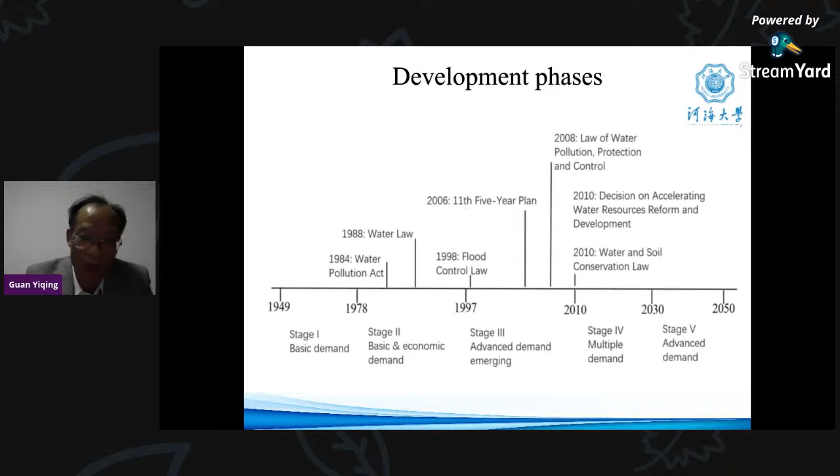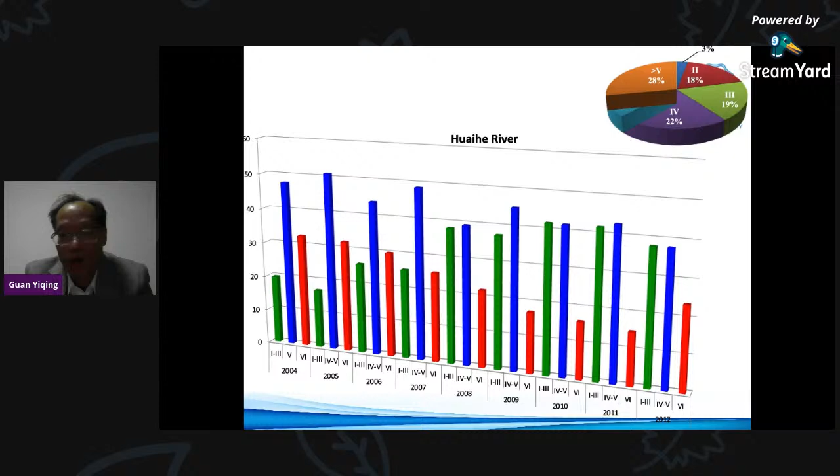In China, there are many bigger problems for water, but currently the most important problem is water pollution. There are three famous rivers: the Huaihe River, the Haihe River, and the Liaohe River, all in North China. These three rivers have less runoff but high pollution problems in those regions.

This is data for the Huaihe River, showing pollutant levels from 2004 to 2012. We classify water quality from class 1 to 5, and even worse than 5 we use class 6. The blue and red lines represent water that can't be used for agriculture. The green lines—class 1, 2, and 3—represent good quality water. But at the beginning, in 2004, polluted water was more than 40% in the Huaihe basin.

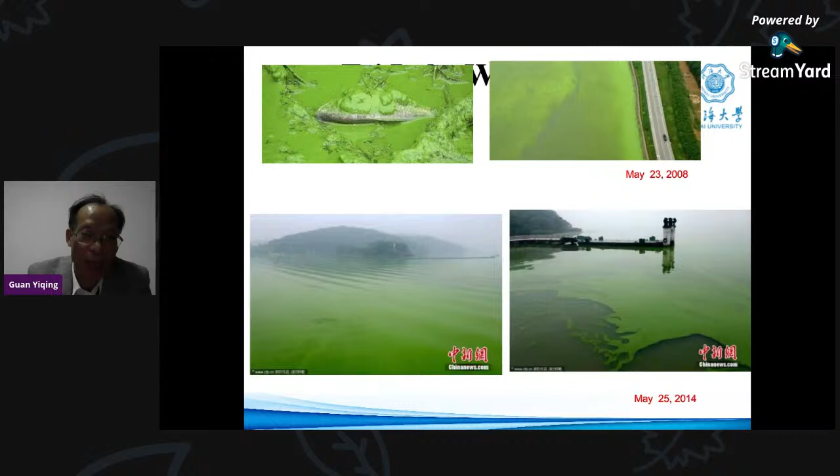For the rivers, as I said before, we have 3 rivers in the North that are seriously polluted. And for the lakes, not only the Tai Lake, but also several other lakes, bigger ones and smaller ones. One is the Dianchi Lake in Yunnan province, Kunming city, also very seriously polluted. That polluted water can't be used for water supply and also can't be used for agriculture.

And the third one is the Chaohu Lake in Anhui province, which has the same problems, especially from April to November, when the lake has algae bloom problems, so it also can't be used. The water can't be used for water supply, agriculture, or industry use.

Here we show some figures about the Tai Lake water quality. I show this because in 2007, 2008, we had a bigger problem for Tai Lake, and water supply for the local cities was stopped. No water for water supply. The residents went to the shops just to buy bottles of mineral water, and all the shops were empty. They didn't have enough water for drinking or cooking. So this was a big problem for society's safety.

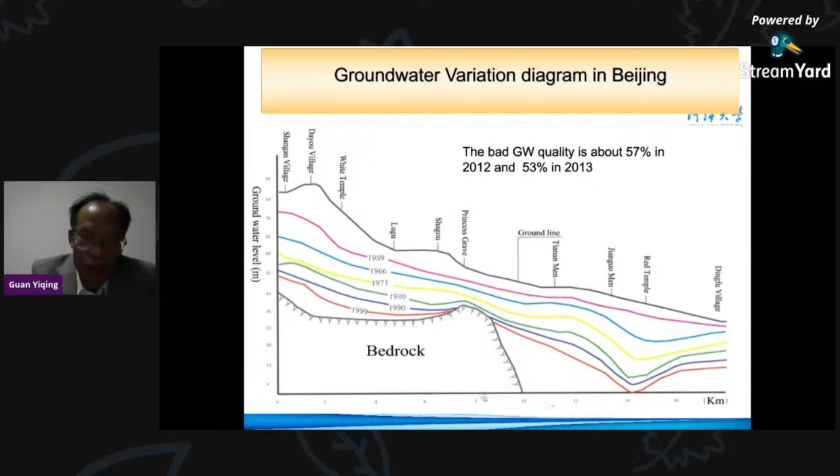So in China we have a lot of problems for water. One is water shortage, another is water pollution. So we should use integrated water resource management tools to achieve SDG 6.

For integrated water resource management, IWRM, it was proposed by GWP. It means we should use management instruments involving environmental and institutional rules to do the management. This management is based on equitable and efficient management to achieve sustainable use of water resources. We should also use technical tools, education tools, and policy regulation. Different tools can help us achieve well-managed water resources to meet at least the minimum demand.

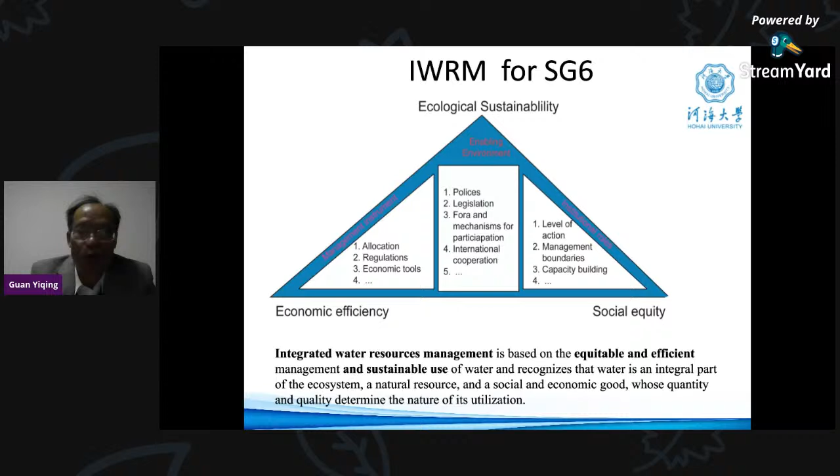In China, for water pollution control, we have a lot of rules, policies and regulations. First is the EIA law, and also the circular economy promotion law, water law, which was established in 1988 and later revised in 2002. We also consider the water and soil conservation law, the air pollution control law, and also the water pollution control and prevention law.

We have a lot of laws and regulations proposed by the Chinese government to protect the water resources. To achieve integrated water management, we should have different measures. Normally we consider institutional measures and also engineering measures. Before that, integrated water management is an approach, tools, or processes.

First, we should consider that at each stage we should think about integration. First, we focus on measures for strategic planning. It has long-term, mid-term, and short-term planning. Normally for the mid-term in China, we have different phases for national level planning, for economic development, and also for water. And also we should change regulation and policy, adjusted to meet and solve the problems.

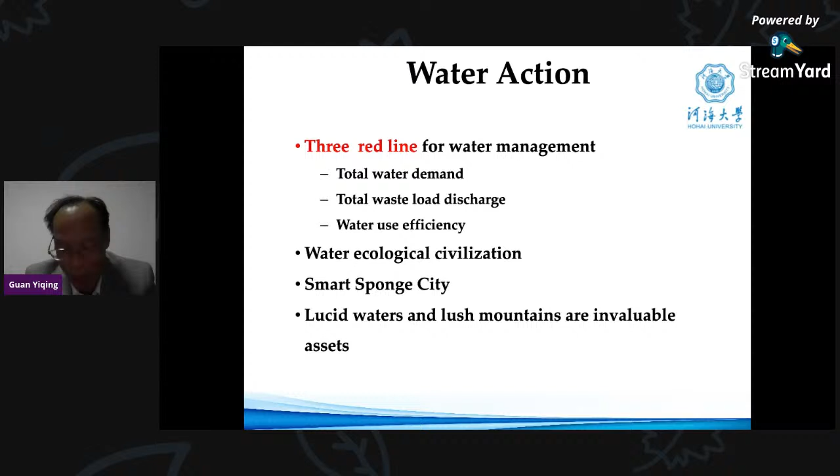The central government also talks about water ecology civilization. This is very popular in China now - it means the blue water and green mountains are as good as mountains of gold and silver. It means very valuable. For green, when we talk about economic development, we think the green GDP is the most important. We need water, we need clean water for our life, for our living environment.

This is all for my presentation, and for the conclusions and recommendations, I will leave it here. Okay, thank you for your attention. I'm very sorry, maybe it was too long.

Don't worry about it. Thank you very much for your excellent presentation. Now we will enter a discussion period where we will ask the speakers to clarify some doubts received in the chat. To start off, I would like to ask Dr. Wan a question: What are the possible effects that your country is facing trying to fulfill SDG 6?